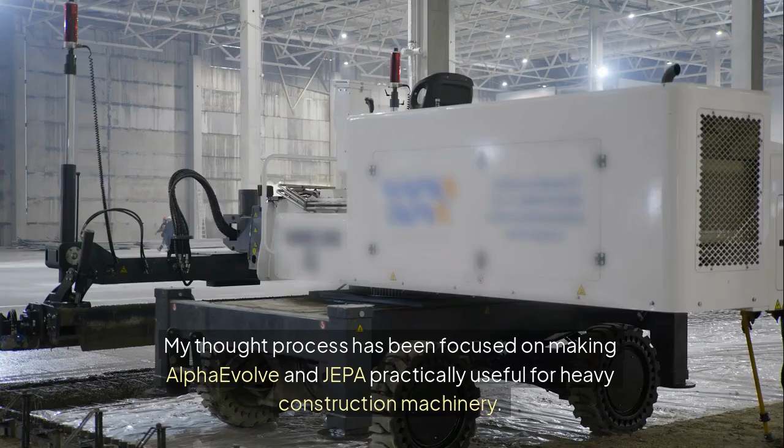My thought process has been focused on making AlphaEvolve and JEPA practically useful for heavy construction machinery. Initially, my ideas centered on autonomy, how these AI systems could grant excavators and bulldozers more independent control. I aimed to sketch out clear, detailed scenarios to demonstrate how JEPA could translate high-level goals from AlphaEvolve into sophisticated, nuanced control strategies for machines on the ground.

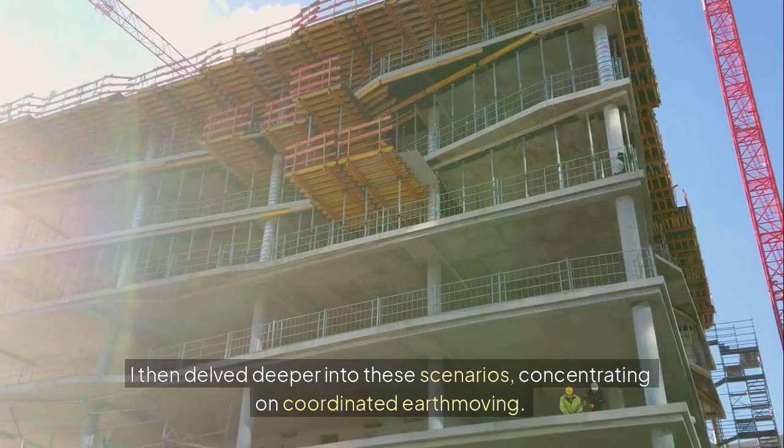I then delved deeper into these scenarios, concentrating on coordinated earth-moving. The concept was for AlphaEvolve to design the overall excavation plan, while JEPA would simulate real-world complexities like soil-machine interactions and equipment wear. The goal was to highlight how JEPA's detailed simulations could provide feedback to AlphaEvolve, enabling it to fine-tune plans for peak efficiency and minimal machine damage, always considering real-world challenges.

Subsequently, I pushed to refine these use cases for more intricate problems, moving beyond basic machine control. My focus shifted to complex situations, such as fully autonomous earth-moving with multiple machines working in concert, and optimizing fleet-wide fuel efficiency and wear. The core idea was AlphaEvolve orchestrating the entire operation, from task assignment to real-time adjustments, with JEPA providing detailed simulations of soil dynamics, machine wear, and sensor data. This marked a stronger emphasis on real-world constraints.

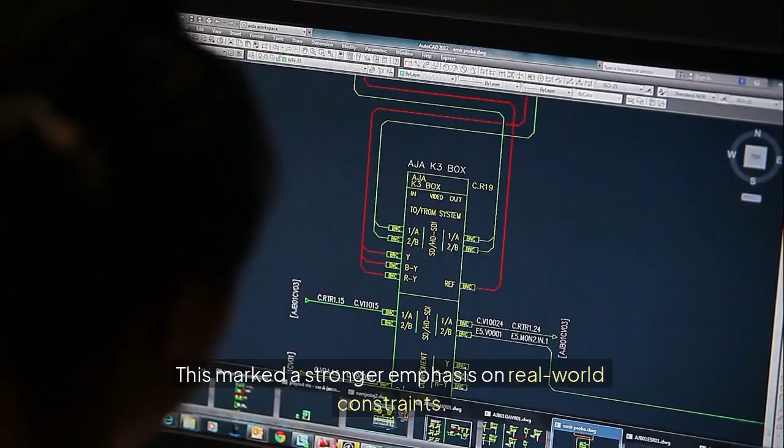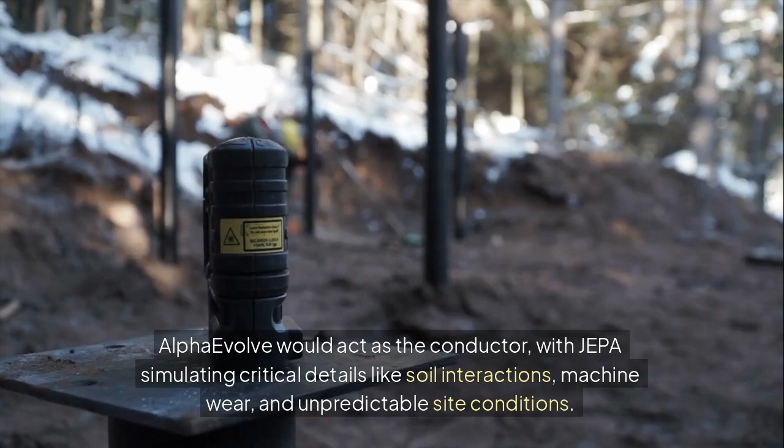From there, I developed more distinct use case scenarios, prioritizing aspects like optimizing fleet-wide operations, integrating human operators, and even using AI to propose new machine designs. For autonomous earth-moving, I concentrated on coordinating multiple machines for precise terrain modifications. AlphaEvolve would act as the conductor, with JEPA simulating critical details like soil interactions, machine wear, and unpredictable site conditions. My objective was to clearly demonstrate AlphaEvolve's strategic planning power alongside JEPA's detailed simulation capabilities.

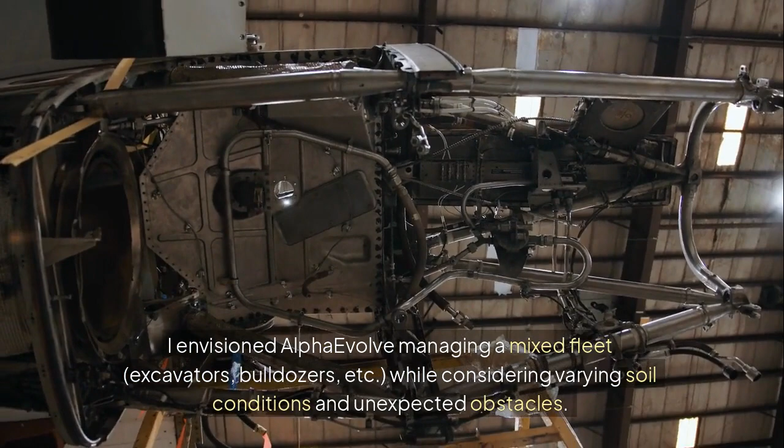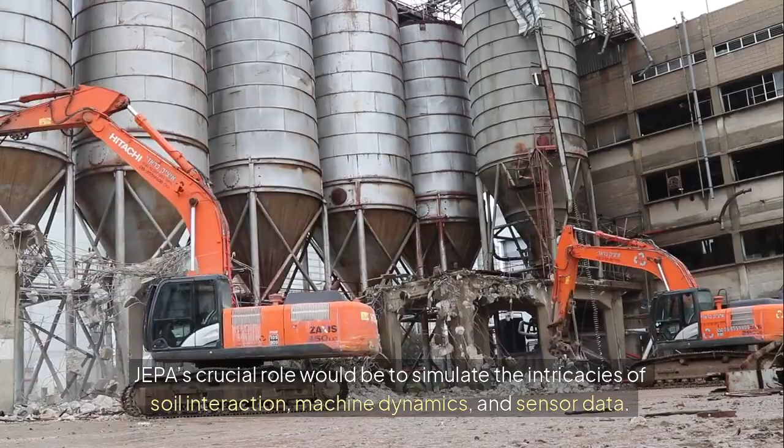This led me to a highly detailed scenario, orchestrating complex construction, specifically autonomous earth-moving. I envisioned AlphaEvolve managing a mixed fleet, excavators, bulldozers, etc., while considering varying soil conditions and unexpected obstacles. JEPA's crucial role would be to simulate the intricacies of soil interaction, machine dynamics, and sensor data. I particularly focused on how JEPA's simulations could create a feedback loop, informing AlphaEvolve's strategic planning and allowing for real-time adjustments to boost efficiency and safety.

It became clear that more specific and challenging examples were needed, especially ones that truly grasped the construction machine focus, as some earlier examples were too generic. I knew I had to provide something truly detailed and complex, showcasing the powerful synergy between AlphaEvolve and JEPA with excavators, bulldozers, and similar equipment. That's what brought me to this advanced example: fully autonomous, multi-machine coordinated site preparation and earth-moving.

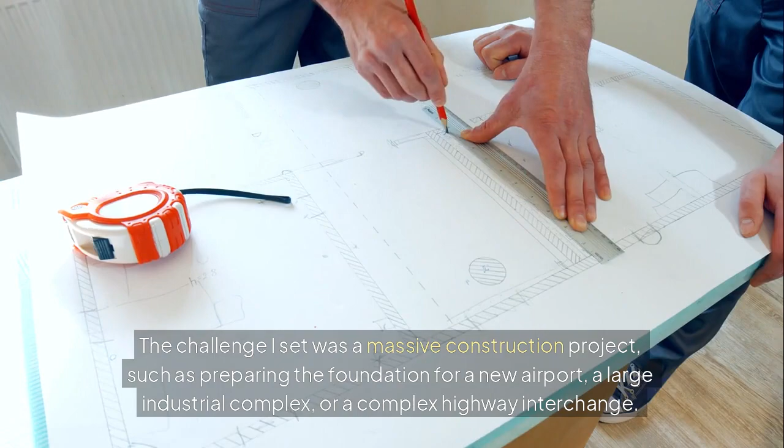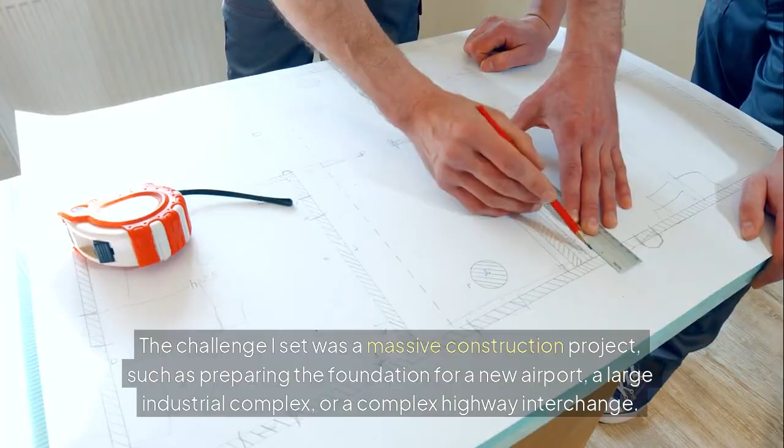The challenge I set was a massive construction project, such as preparing the foundation for a new airport, a large industrial complex, or a complex highway interchange. This involves precise terrain sculpting, moving vast quantities of diverse earth materials, rock, clay, sand, to match a detailed 3D engineering plan. A heterogeneous fleet of machines, excavators, bulldozers, dump trucks, compactors, must work in concert. The environment is dynamic and unpredictable, with potential for unexpected underground obstacles, weather-induced changes in soil conditions, and the overarching need for safety even in a mostly autonomous setup.

The optimization goals are multifaceted: speed, minimized fuel consumption and machine wear across the fleet, adherence to tight engineering tolerances, and paramount safety. Our smarter solution with AlphaEvolve and JEPA addresses this challenge as follows. AlphaEvolve acts as the master site operations strategist, the fleet commander, crafting a comprehensive, adaptive, multi-layered operational strategy. First, through high-level task decomposition and sequencing, AlphaEvolve takes the 3D site plan and survey data, breaking down the entire earth-moving operation into a logical sequence of tasks and subtasks, determining the optimal order while considering dependencies.

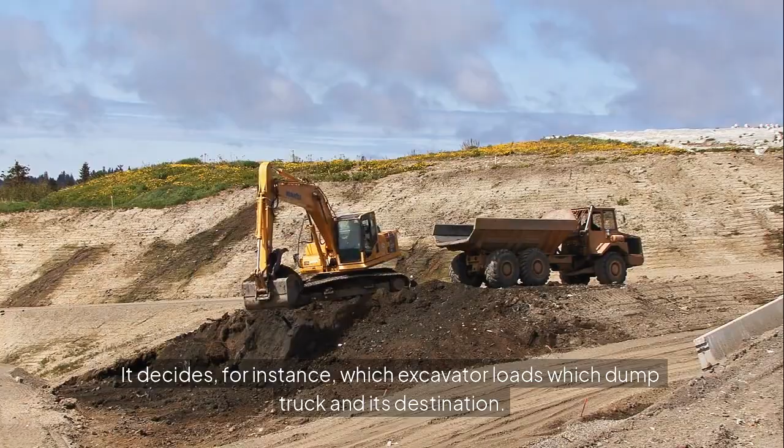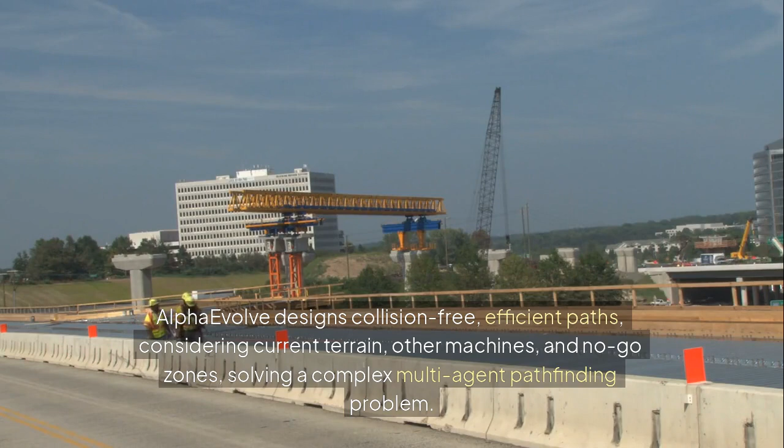Then, with dynamic task allocation and resource management, AlphaEvolve designs algorithms to assign specific machines to tasks on the fly, considering their capabilities, location, fuel levels, maintenance status, and the work site state. It decides, for instance, which excavator loads which dump truck and its destination. Next, optimized path planning and traffic control is established for every machine. AlphaEvolve designs collision-free, efficient paths, considering current terrain, other machines, and no-go zones, solving a complex multi-agent pathfinding problem.

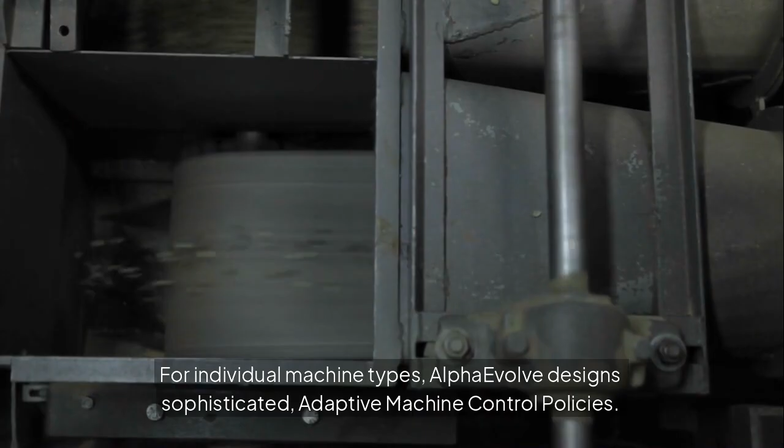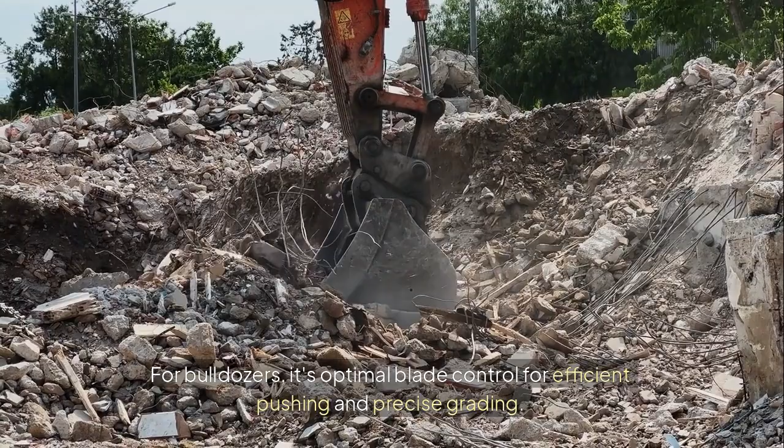For individual machine types, AlphaEvolve designs sophisticated, adaptive machine control policies. For excavators, this means optimal digging patterns to maximize fill rate and minimize energy per cubic meter, adapting to soil hardness. For bulldozers, it's optimal blade control for efficient pushing and precise grading. For dump trucks, it involves optimal acceleration and deceleration profiles to save fuel. Crucially, AlphaEvolve also designs contingency and anomaly response algorithms. These dictate how the fleet reacts to unforeseen events like hitting an unmovable boulder, a machine getting stuck, changes in soil stability, or sensor malfunctions, involving replanning, reallocating tasks, or flagging issues for human intervention.

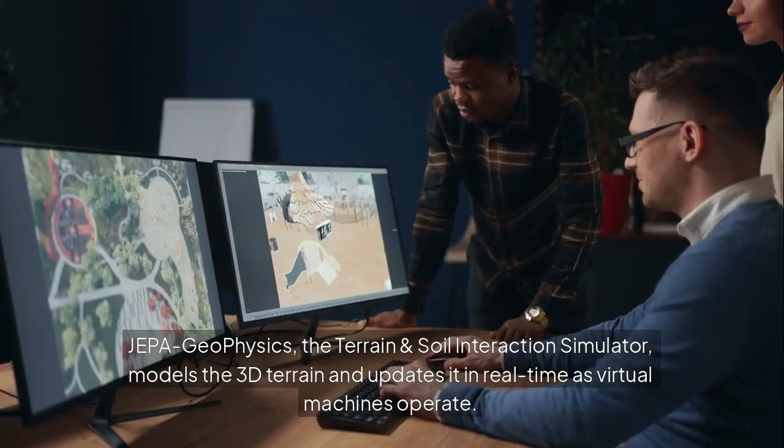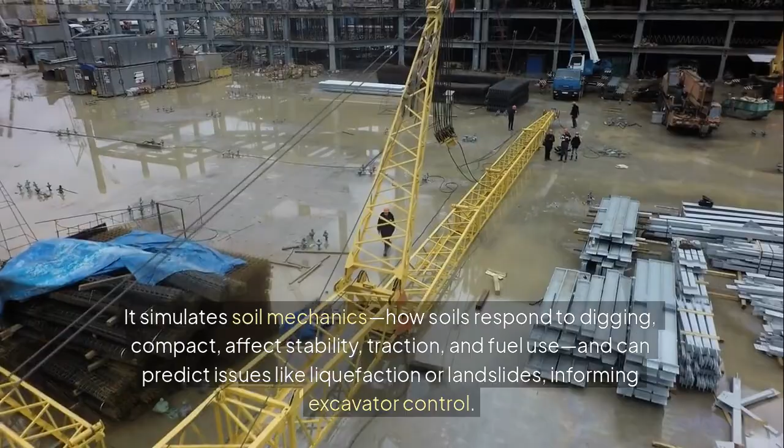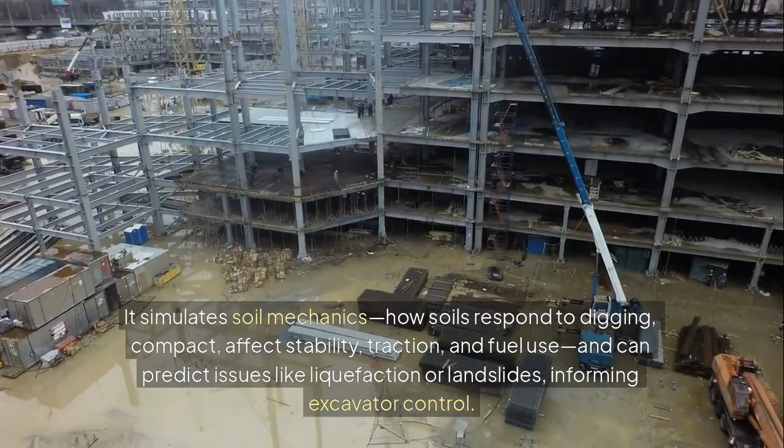JEPA's advanced role is to be the hyper-realistic digital twin of the entire construction site and machine fleet, an incredibly detailed, physics-based simulation environment. JEPA-GeoPhysics, the terrain and soil interaction simulator, models the 3D terrain and updates it in real time as virtual machines operate. It simulates soil mechanics, how soils respond to digging, compact, affect stability, traction, and fuel use, and can predict issues like liquefaction or landslides, informing excavator control.

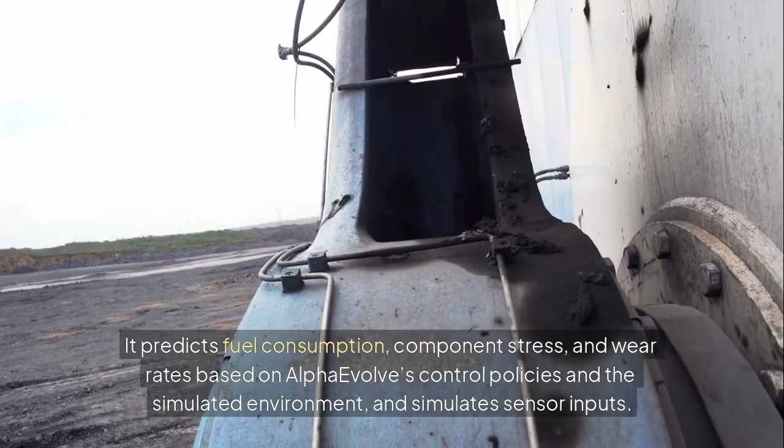JEPA-MachineDynamics, the individual machine simulator, models detailed kinematics, dynamics, powertrain, hydraulics, and soil interaction for each machine. It predicts fuel consumption, component stress, and wear rates based on AlphaEvolve's control policies and the simulated environment, and simulates sensor inputs.

JEPA-FleetLogistics, the multi-agent interaction simulator, simulates the entire fleet operating concurrently, detecting potential collisions, material flow bottlenecks, and tracking overall progress. Optionally, JEPA Environmental, a weather and hazard simulator, could simulate how rain affects soil and traction, or how dust impacts sensors, testing the robustness of AlphaEvolve's strategies.

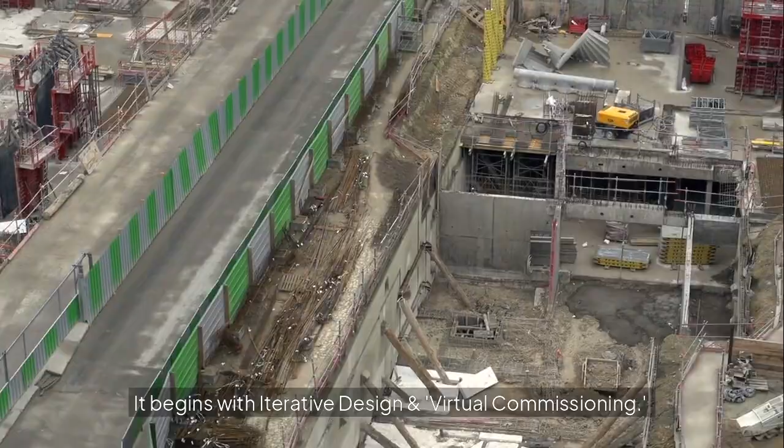The real power comes from their intricate synergy. It begins with iterative design and virtual commissioning. AlphaEvolve proposes a complete operational plan. JEPA then runs a full-scale, accelerated simulation of this plan on the virtual site, simulating days or weeks of operation

in hours. JEPA provides rich, multifaceted performance feedback to AlphaEvolve on progress, accuracy, efficiency, fuel, operational hours, idle time, wear and tear on virtual machines, and safety, virtual collisions, stuck machines, handling of unexpected obstacles. This feedback loop drives the evolution of complex strategies.

If JEPA shows inefficiencies, AlphaEvolve evolves its task allocation or control policies. If a virtual machine struggles, AlphaEvolve refines its algorithm or suggests alternative approaches. If JEPA simulates an obstacle, it tests AlphaEvolve's contingency algorithm.

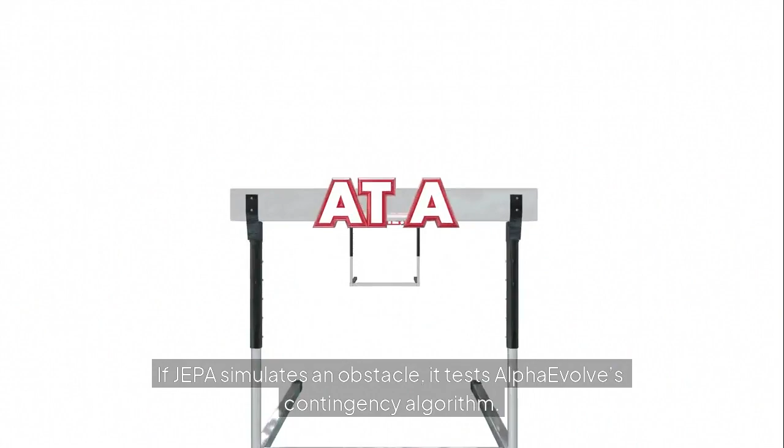This system is also excellent for optimizing for emergent behaviors, allowing AlphaEvolve to design rules or incentives to prevent undesirable outcomes like machines unintentionally blocking each other. Critically, pre-training of control policies is possible. Individual machine control policies designed by AlphaEvolve can be extensively pre-trained and validated within JEPA's high-fidelity models before real-world deployment.

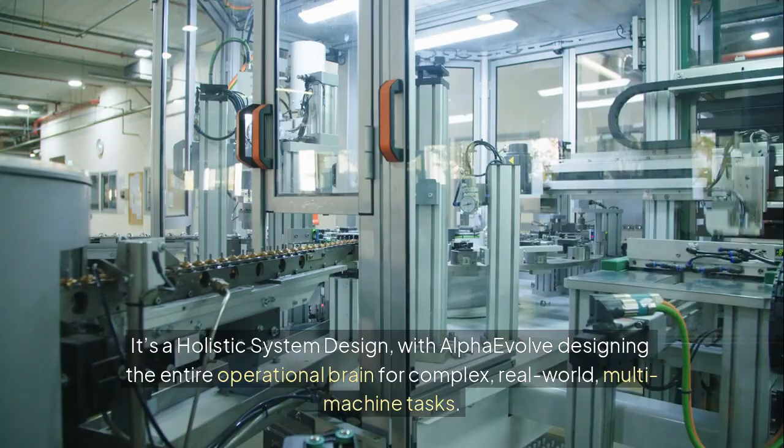This approach is significantly better and more complex for several reasons. It's a holistic system design, with AlphaEvolve designing the entire operational brain for complex, real-world, multi-machine tasks. It uses physics-rich simulation, as JEPA simulates complex physics crucial for realistic evaluation. It allows for anticipatory problem-solving, enabling AlphaEvolve to design robust strategies by simulating diverse and challenging scenarios.

There's a massive reduction in real-world trial and error, making it feasible to test thousands of complex strategies virtually. And it addresses safety criticality, allowing exhaustive testing of safety protocols in a risk-free virtual environment. This kind of integrated system, I believe, could lead to construction sites that are significantly more efficient, faster, cheaper to operate, and safer, all by leveraging AI to design and manage operations at an unprecedented level of complexity and adaptiveness. That's the vision I'm working towards.

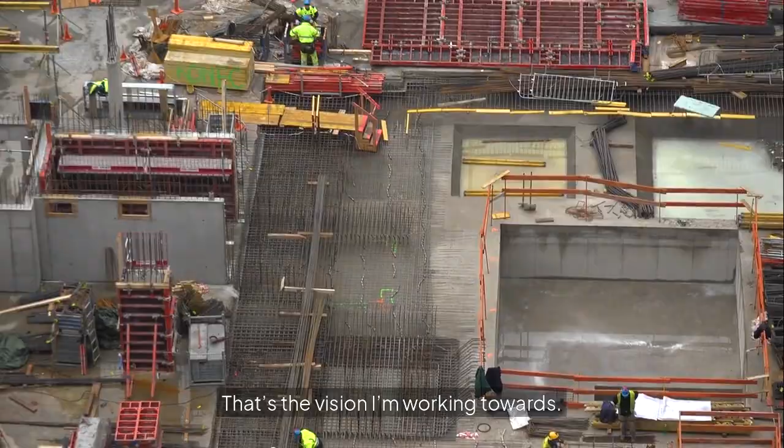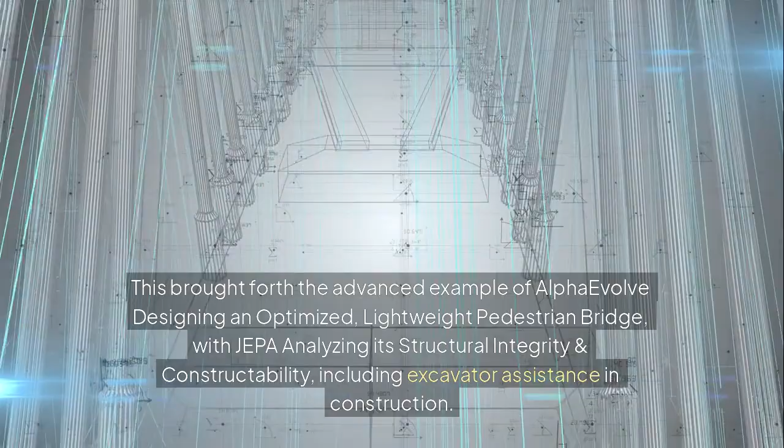Incorporating structural engineering principles, statics, moments, dynamics, is also vital, as construction often involves building structures or understanding machine-structure interactions. This led me to consider how AlphaEvolve could design not just the operation, but the structure itself, with JEPA as a sophisticated virtual structural analysis lab. This brought forth the advanced example of AlphaEvolve designing an optimized, lightweight pedestrian bridge, with JEPA analyzing its structural integrity and constructability, including excavator assistance in construction.

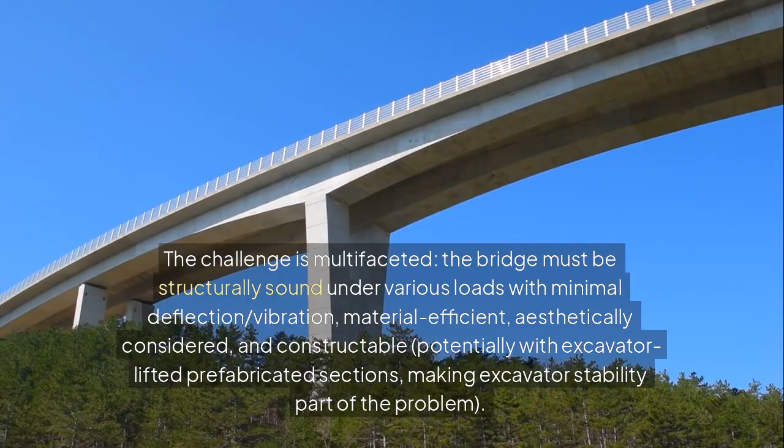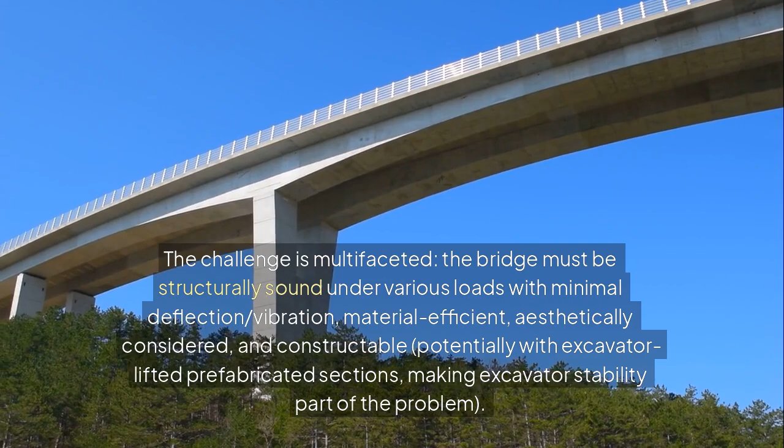The challenge is multifaceted. The bridge must be structurally sound under various loads with minimal deflection/vibration, material efficient, aesthetically considered, and constructible, potentially with the excavator lifting prefabricated sections, making excavator stability part of the problem. Dynamic performance is also key.

AlphaEvolve acts as the master structural architect and construction process designer. It can generate novel structural forms and optimize member sizing and material distribution. It considers connection details, construction sequencing, and temporary loads, especially during excavator lifts. JEPA then becomes an incredible virtual structural analysis lab and construction site simulator.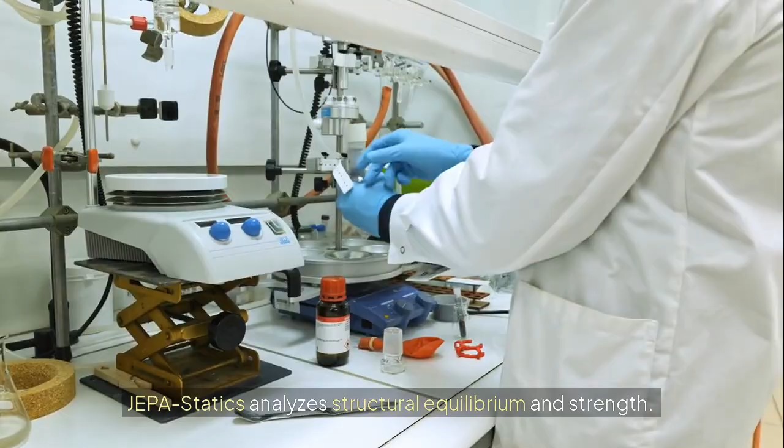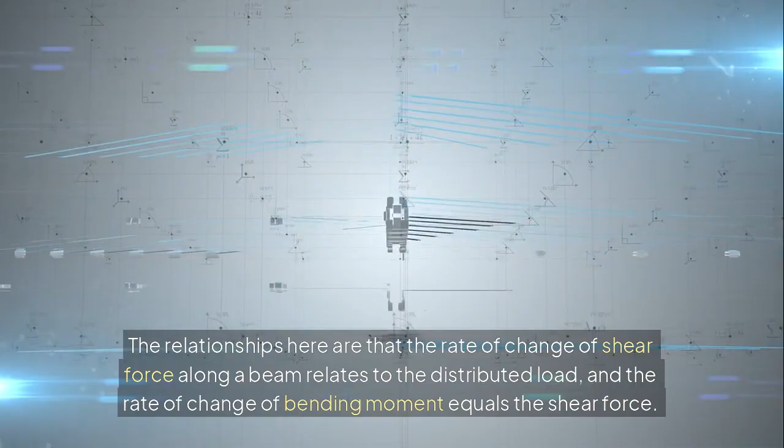JEPA Statics analyzes structural equilibrium and strength. It applies static loads to AlphaEvolve's 3D bridge design and performs finite element analysis, FEA, to calculate internal forces: axial, shear, bending moments. The relationships here are that the rate of change of shear force along a beam relates to the distributed load, and the rate of change of bending moment equals the shear force.

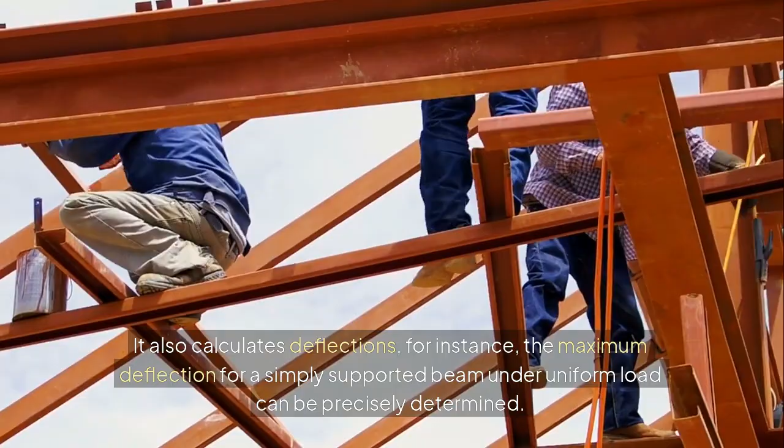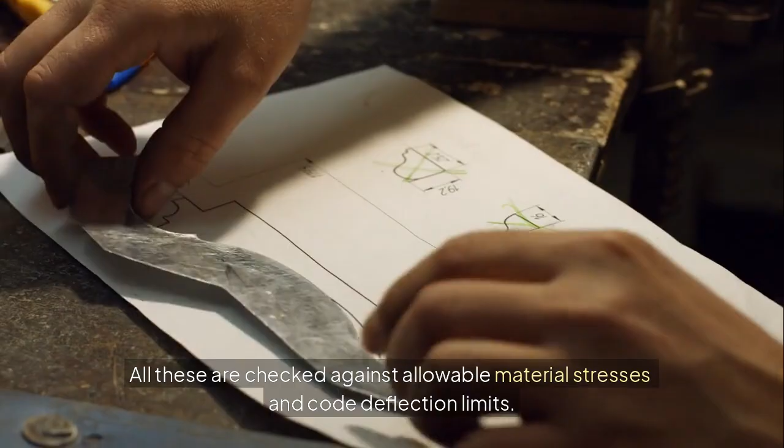It calculates stresses: axial stress, direct force over area; bending stress, from moments, dependent on shape and distance from neutral axis; and shear stress, related to shear force on the cross-section. It also calculates deflections. For instance, the maximum deflection for a simply supported beam under uniform load can be precisely determined. All these are checked against allowable material stresses and code deflection limits.

JEPA-Dynamics, the vibration and seismic/wind response analyzer, performs modal analysis to find natural frequencies and mode shapes to avoid resonance. This involves solving an equation relating the structure's stiffness and mass to its natural vibration characteristics. It can also do time history analysis using the full equation of motion, balancing external dynamic forces against the structure's inertial, damping, and stiffness forces over time, checking pedestrian comfort criteria.

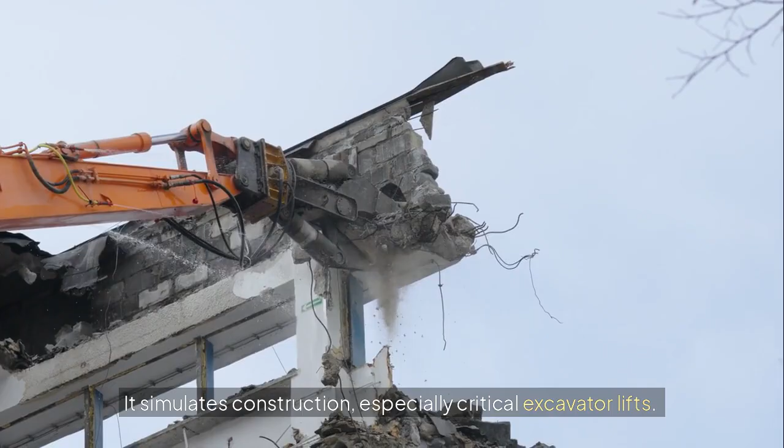JEPA Construction Dynamics and Machine Interaction analyzes buildability and temporary stability. It simulates construction, especially critical excavator lifts. It checks excavator stability, ensuring tipping moment, calculated as segment weight times lift radius, doesn't exceed stabilizing moment, approximated by excavator/counterweight weight times its effective radius. It calculates loads on the partially completed structure during lifts, including dynamic factors. Effective lift force is segment weight times a dynamic factor, and it analyzes temporary bracing.

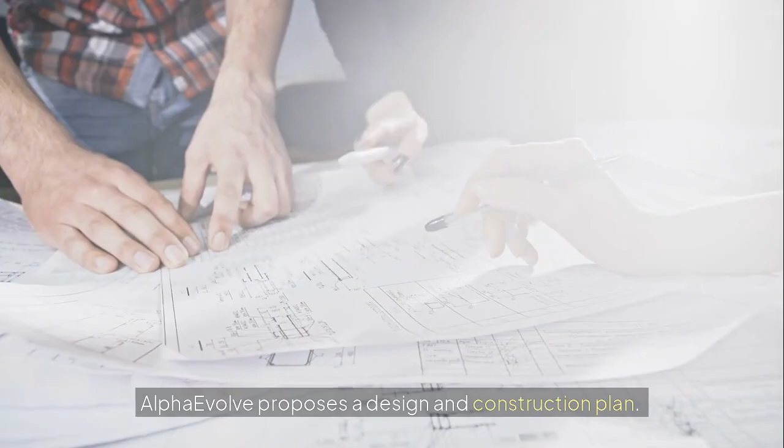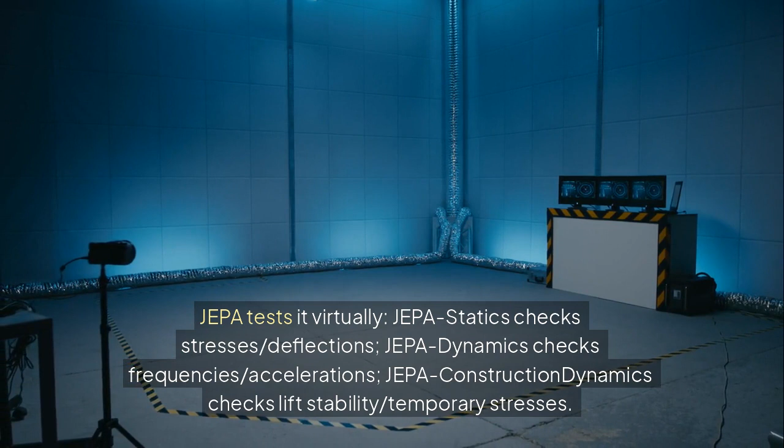The synergy is an iterative design and analysis loop. AlphaEvolve proposes a design and construction plan. JEPA tests it virtually. JEPA Statics checks stresses/deflections. JEPA Dynamics checks frequencies/accelerations. JEPA Construction Dynamics checks lift stability/temporary stresses. Based on this multi-physics feedback, AlphaEvolve refines the design. This loop repeats, converging on a design satisfying all constraints.

This is better and more complex because it's an integrated design and analysis. AlphaEvolve's creative proposals are immediately and rigorously tested. It's multi-physics optimization. It enables performance-based design. Constructability becomes a core design driver. It drastically reduces costly physical prototyping by catching flaws virtually.

This deep integration allows exploration of a wider design space, leading to potentially groundbreaking structural solutions optimized across multiple dimensions, including how they are built using real-world machinery. That's the direction I'm pushing this research.